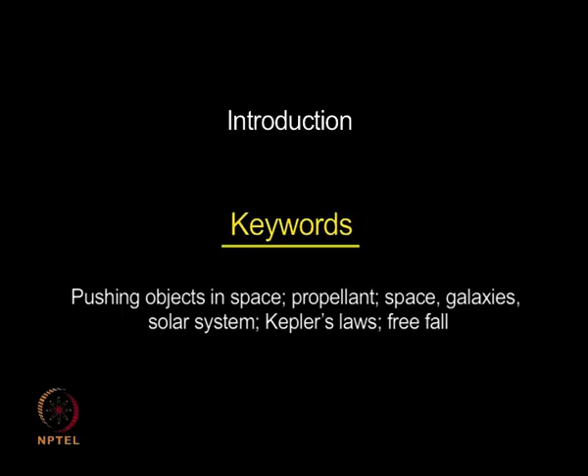Good morning. This will be our first class on rocket propulsion. Today we will look at what the subject of rocket propulsion is, how it differs from other propulsion subjects, and what aspects we must consider. We will go through the course contents, the books we must refer to, and then get started. The introductory part will take something like 10-15 minutes.

Let's take a look at what this subject of rocket propulsion is about. The word propulsion, if you see, comes from the Greek word propellere. The word propellere in Greek means push, therefore we are talking of something pushing.

Pro, as you know, means something like forward or before. Therefore the word propulsion means push forward, and whenever we talk of any subject on propulsion, what we mean is pushing forward. Let us take the simple example of a car which has to climb up a hill, up an inclined plane.

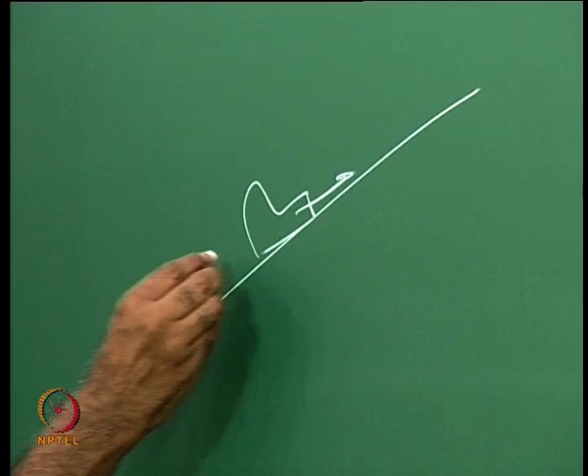What we do is the engine of the car pushes it forward, and by pushing I mean you are changing the velocity of the car, or you are imparting a momentum to the car.

What is momentum? Momentum is change of what? You are imparting some change of momentum to the car. How would you define momentum?

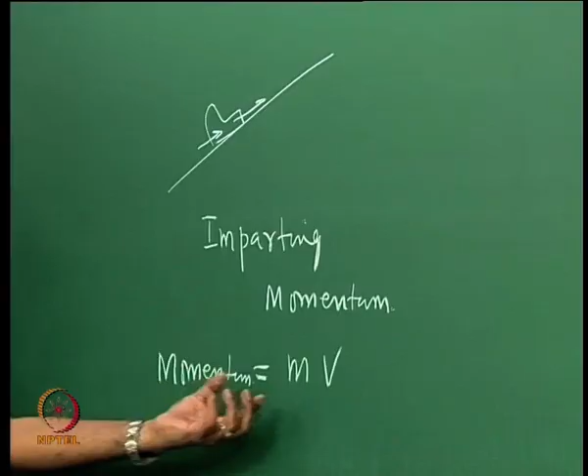We say the car has a velocity v, it has a mass m, and mass into velocity is what is momentum. If you want to change the momentum, you change the velocity of the car, you give some velocity, and you have what we call momentum.

Now in space, deep space, we do not have something like atmosphere, and therefore the act of imparting momentum to an object in space is what we deal with in rocket propulsion.

I will repeat this. All we are saying is propulsion means pushing objects, and when we say rocket propulsion, we are dealing with pushing objects in space. Space means anything beyond us, maybe up there. So first we must get an idea on what space is about.

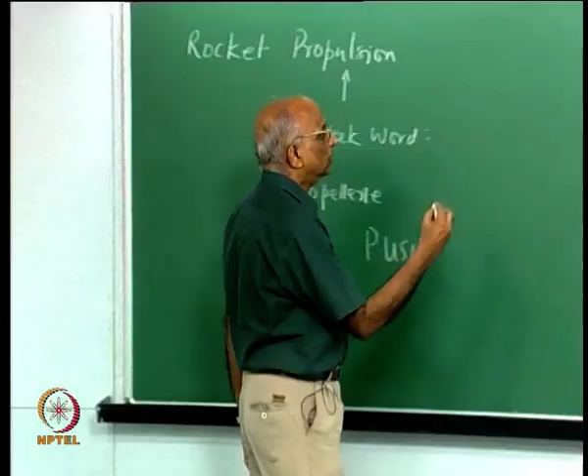Let us understand what we mean by space, but before that, let us quickly get through some idea on what this whole course is about and how we are going to organize our next 40 classes or so. To be able to organize ourselves, let me get started here.

Maybe the first class, starting today, we will look at what we mean by the word space, what constitutes space, and in what way motion in space is going to be different than motion on the ground. That means we talk about motion in space, and once we know how motion takes place in space, maybe we will be able to find out the exact requirements that a rocket must meet.

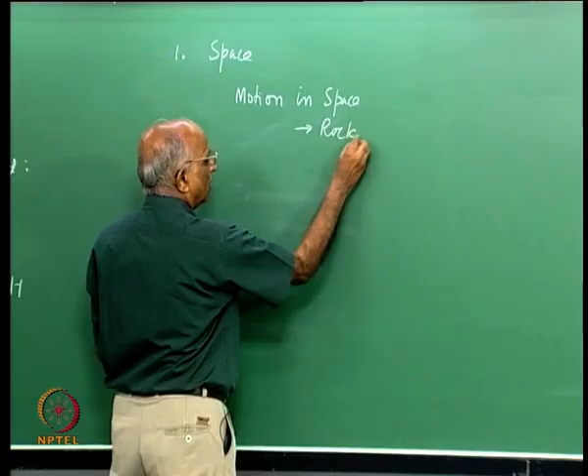To be able to design a rocket, which could be something very small or it could be huge, I must know what is the requirement of motion in space so as to go and make a particular rocket. Therefore the first chapter will deal with motion in space and how we go about converting this motion in space to the requirement of a rocket.

Once the requirement of a rocket is clear to us, the second chapter will deal with the theory of rockets. I would like to ask a question: why should a theory of rockets be different from a theory of a car? Or let us say I have a gun, I fire a gun, the bullet leaves the gun. In what way is a rocket different from a gun?

What is your thinking on it? Anybody could answer that? You say it's a non-air breathing system. So what? We will get into some details of air breathing versus non-air breathing. Your point is it's a non-air breathing system, but in what way should a rocket be different?

Let us say I have a gun, I fire a bullet from a gun, I am also leaving it at high velocity. Why should we call it theory of rockets? What is the great theory about it?

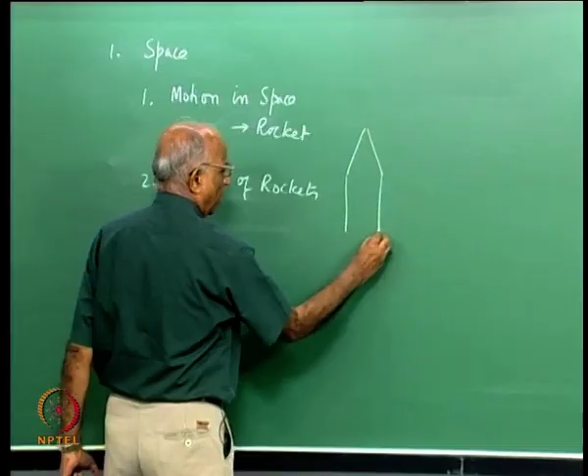What happens is in a particular rocket, let us say we just assume a rocket is like this - there is some mass which is available in the rocket. What is the mass which is available in a rocket? The mass must be able to push forward, that means it propels the object.

And what is the object? You have something like a space capsule which it pushes forward, and what propels this is what we call a propellant.

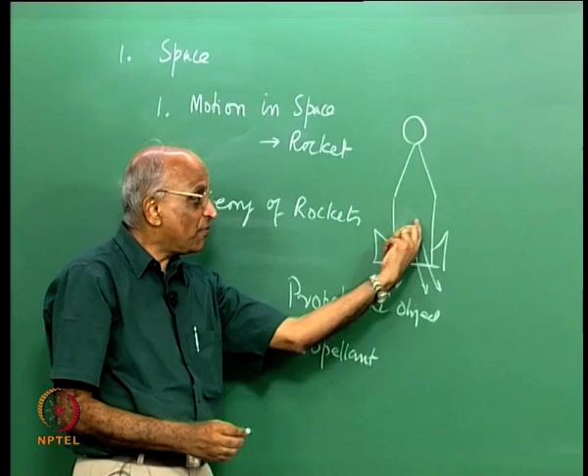By propellant in a rocket, we mean the substance used for pushing up the rocket, or propelling the rocket. In the case of a rocket, the propellant is continually getting exhausted, it leaves the rocket, and the weight of the rocket keeps coming down. Compared to a car in which I carry something like 10 liters of petrol, I carry tons and tons of propellant which is ejected out. So the theory of a rocket is different from a car or a bullet, and we have to look at the theory of rockets, which is the second chapter.

Having finished the second chapter, we told ourselves to push an object we need to give a change of momentum, and so we will go into nozzles which produce high velocity and help us achieve a large change of momentum to the object in space.

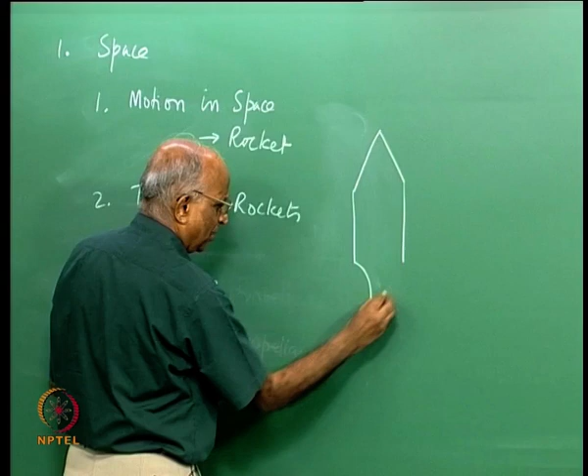You have all studied nozzles in your gas dynamics course, right? Has anyone not done it? We will start from the basics, go through the basics of nozzles, advanced nozzles, but it is quite an involved chapter. If you have something like a rocket, let me sketch the internal configuration, I have something like a nozzle here. The flow must run full, otherwise if some portion does not run full, I could get a side force in addition to getting a force in this direction. So the theory of nozzles is quite involved, and the third chapter we do here is on nozzles.

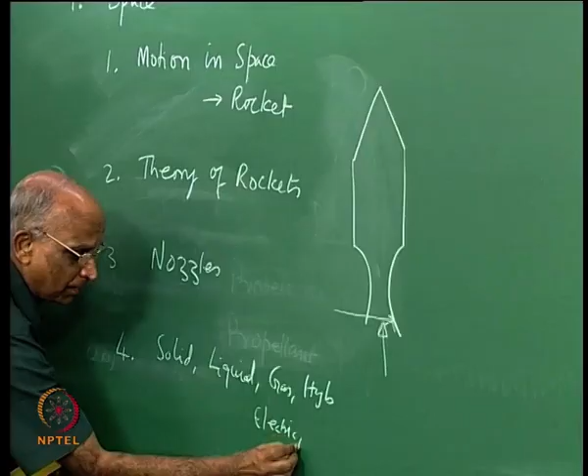The fourth chapter we will get back into the propellants, what is used for propelling could either be a solid propellant, a liquid propellant, a gaseous propellant, a hybrid combination of these, could be electricity itself, could be nuclear, could be anything, right? In the fourth chapter we will study the different propellants, what are the characteristics required to make a good rocket, studying solid, liquid, gas, hybrid, electric, maybe nuclear propellants.

Once we are clear about the propellants, we can go into the details of the rockets. The fifth chapter would be solid propellant rockets, and this type of rockets has been used very extensively in India, both for GSLV and PSLV. We will look at the design considerations, what constitutes a solid propellant rocket.

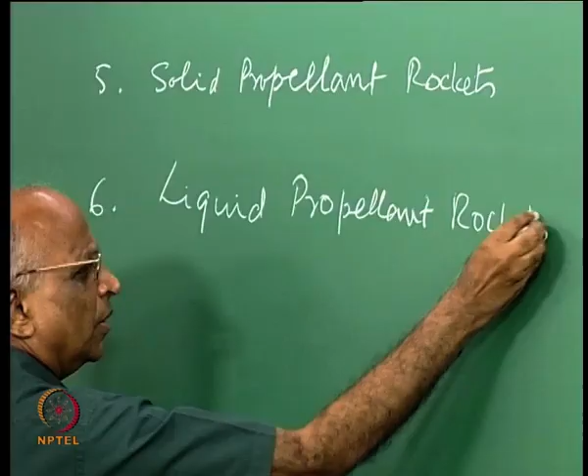The sixth chapter would be on liquid propellant rockets. They are more versatile, and in this chapter we will basically look at the cycles of operation, in what way it differs from a gas turbine combustor or an IC engine, and what are the modeling features. The liquid propellant rocket is something which is evolving, and when we talk of cryogenic propellants, it is again a form of liquid propellant, so we will spend quite some time on this.

The 7th chapter would be something like, since we have studied solid and liquid, we can study something on hybrid and something like a single propellant, what we call monopropellant rockets.

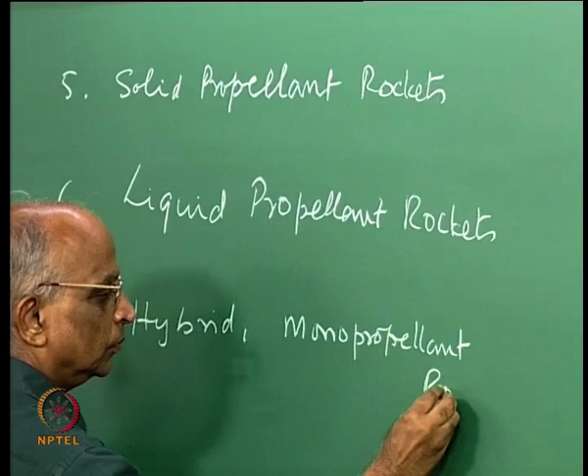This would finish the different types of rockets, how to make them, what are their features, and what are the problem areas in rockets. Once we are clear about it, we go to an advanced subject which I will call combustion instability. This particular chapter on unstable combustion and instability is particularly important for PG and research students, since we are going to look at what causes, instead of having a steady thrust, it to oscillate under some conditions, instead of burning steadily it explodes under some conditions, and that is what we study in combustion instability.

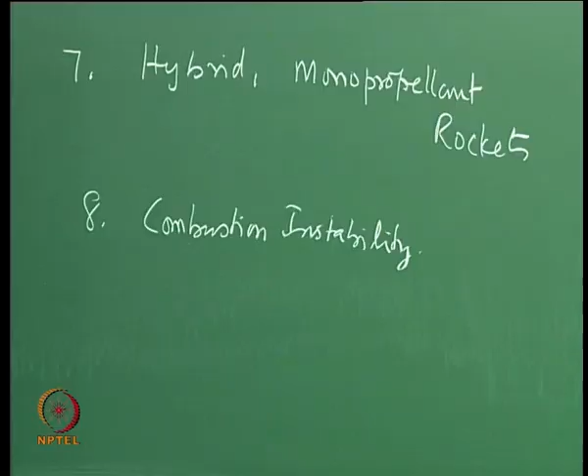We will deal with it in something like 6 to 7 classes. It tends to be important, and this is an area where research work still goes on in rockets. The 9th chapter will be an evolution of some of these things.

Maybe we will look at electrical rockets. What do we mean by electrical rockets? We told ourselves for any rocket we need to push an object in space. We will try to see how we can generate electrical forces, different forms of generating forces using electricity or electromagnetism, and then we will deal with this particular chapter on electrical rockets.

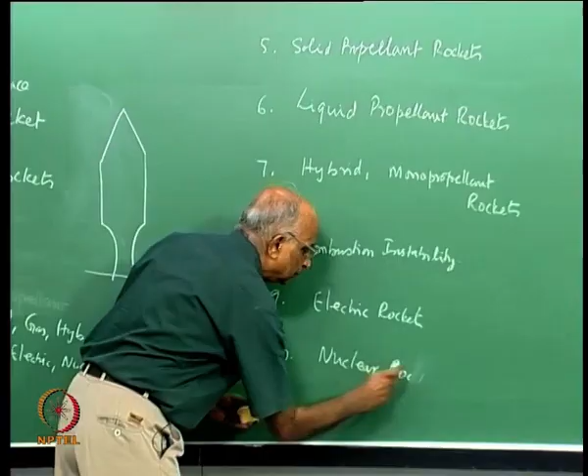The 10th chapter would be on nuclear rockets, and other advanced rockets.

What do we mean by nuclear? I could use nuclear energy to generate a force. I could also use space-time curvature, like relativity, to generate a force, and some of these things we will consider as the last segment of this course.

Let me also briefly brief you on one or two books which I will be following, which are good books for this course. The first book is by Sutton, on rocket propulsion elements. The publisher is Wiley, year of publication is 2001.

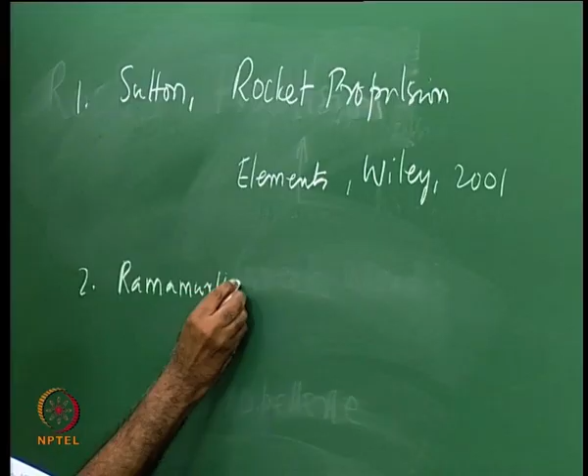This book gives a very good description of rockets, but the mathematics of rockets is missing, and I published one book, the name is Rocket Propulsion. It was published by Macmillan in 2010. This was based on my teaching of the course over the last 6 to 7 years.

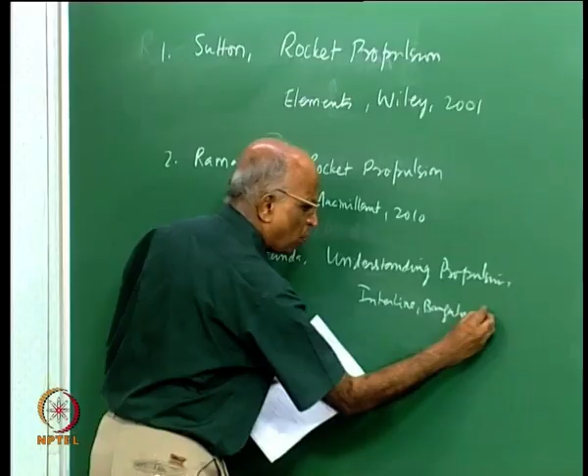A third book which gives good description about the different rockets is by H.S. Mukunda. The name of the book is Understanding Propulsion. It is published by Interline, Bangalore, and I think it was published in 2004.

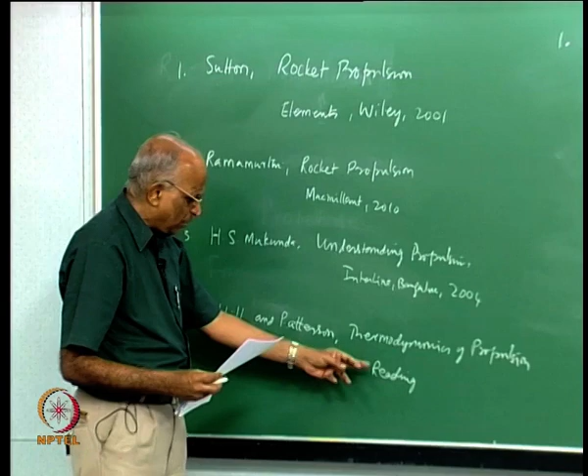I think one important book which I should have put at the beginning is a book by Hill and Patterson. The name of the book is Thermodynamics of Propulsion. The publisher is Addison Wesley. It is an old book, first published I think in 1970 or so, but the second edition is published in 1992.

We have copies of these books in our library. This is a beautiful book, deals with the thermodynamics of propulsion. This deals with a description of many of the propulsion elements. This combines aerospace and rocket propulsion together, whereas this is a little bit more mathematical in the area of propulsion. We should keep this, and as I go along maybe I will introduce more books on specific subjects.

Well, this is the background of the whole course, and I think let us get started now. Let's get started. What do we mean by motion in space? Anybody would like to hazard a guess in what way it will be different than on ground?

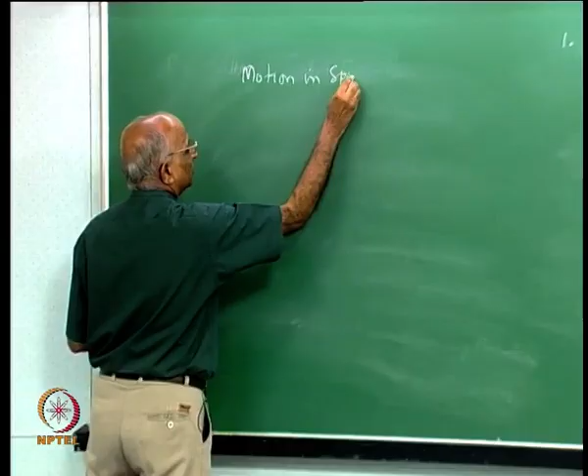Let us first define what is space. How do we define space? Anything above is space, can we say, or how would we define space? We go on up and up, or we go sideways, go to infinity, that is space, or how can we define space? We talk of space capsules, we talk of some planets, we talk of galaxies. How would you define space?

You are telling me that anything outside the atmosphere is space. Therefore, let's take a look at your question and examine what really space is about and what do you mean by atmosphere.

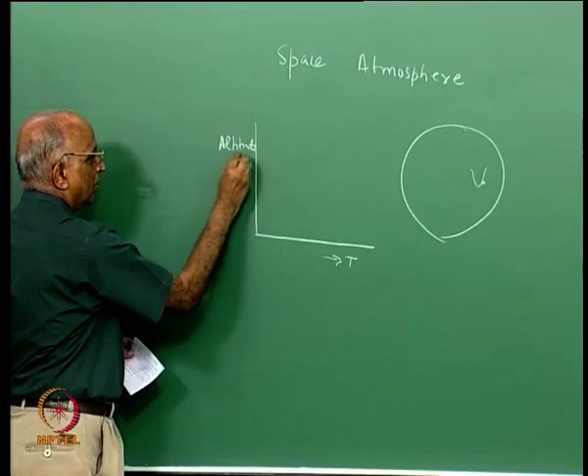Let us say we are here, let us say in Chennai. Chennai is normally hot, and let us try to plot the temperature in the air or atmosphere above Chennai as a function of the altitude, say Z. Since the sun is heating the earth, the surface tends to get hot, maybe the temperature at the surface, let us say, is around 35 to 40 degrees centigrade. As we go higher and higher up, that means as we increase the altitude, the temperature decreases until at an altitude of around 10 to 11 kilometers, the temperature is around minus 50 degrees centigrade.

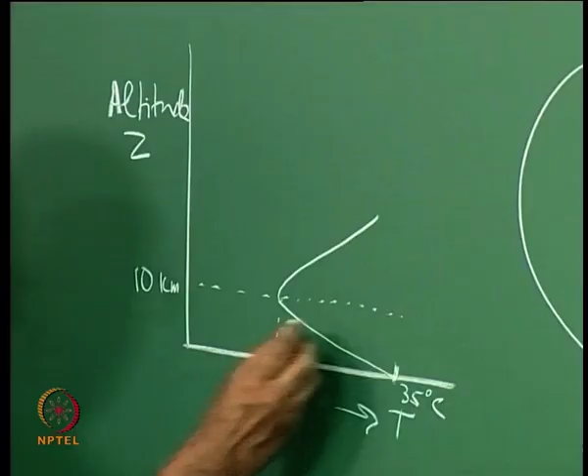These are notional numbers, and thereafter the temperature begins to increase again. That means temperature drops to minus 50 degrees centigrade at an altitude of around 10 kilometers and then begins to increase again. Why does the temperature decrease? The earth receives radiation from the sun, gets heated, and the surface is relatively hotter, and as you proceed away from the surface the temperature drops. This zone wherein the temperature drops is known as the troposphere. The reason temperature drops is the earth is relatively hot, and as we go higher up the temperature drops.

A jet aircraft flies at an altitude of around 8 to 10 kilometers, where the ambient temperature is between minus 40 to minus 50. You would have heard this announcement saying your aircraft is cruising at an altitude of around 10 kilometers, wherein the ambient temperature is of the order of minus 45 to minus 50 degrees centigrade. If you go up still further, the temperature increases.

The increase in temperature is because in this area you have a lot of ozone available. The ozone gets heated by the solar radiation, it absorbs the solar radiation, the temperature increases, and this increase manifests for another 40 to 50 kilometers, let us say 50 kilometers, and the region of increased temperature is what we call the stratosphere.

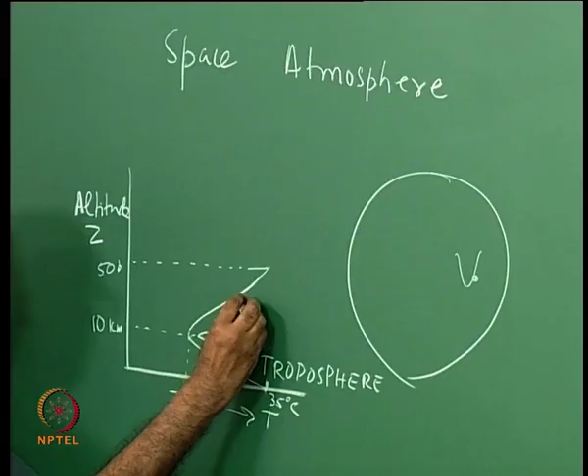But when we go still higher altitude, let us say higher than 50 kilometers, the pressure in air is so small, or the molecules of air are so few that they are unable to absorb any radiation, because there is nothing here. Therefore the temperature again drops to an altitude of around 100 kilometers or so.

But if you go to still higher altitudes, you have molecular oxygen which absorbs radiation, the molecules individually absorb it and increase in temperature, and you have the temperature going up. The region wherein the temperature drops again is what we call the mesosphere.

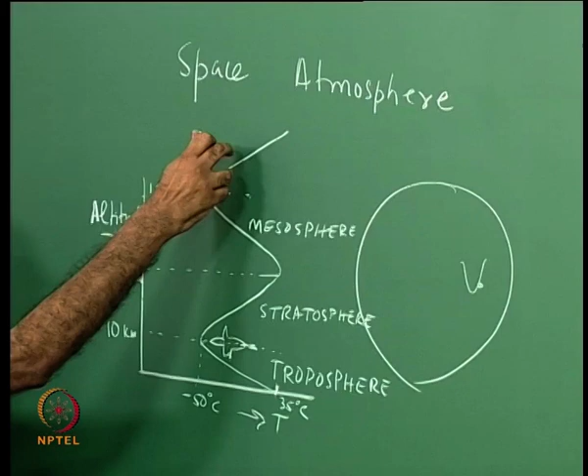And the region of temperature increase, because the individual atoms or molecules of oxygen absorb the radiation, individual atoms or molecules getting heated, is what we call the ionosphere. This continues for something like 100 to 200 kilometers.

If I were to plot the pressure of air as a function of altitude, again I plot the pressure, this is altitude Z in kilometers. At the surface of the earth the pressure is around 100 kilopascal, and the pressure monotonically drops, keeps on falling.

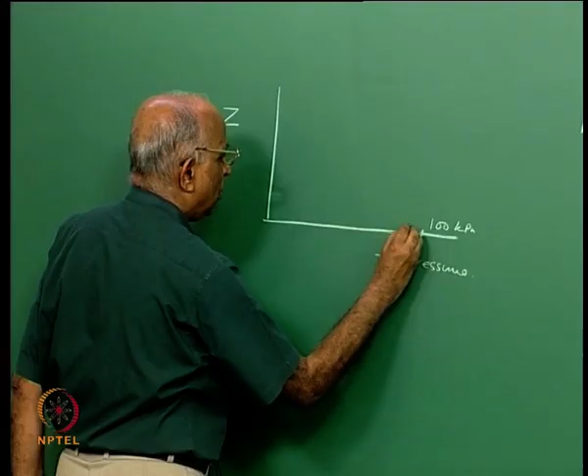Until maybe at the ionosphere you hardly have any traceable quantities of air left, it is all free molecular flow, and this is where we said the temperature increases. The concept of temperature fails because there is no continuum in this region, and it is the individual molecules of some of these gases which tend to get heated to high temperature, so the temperature increases again.

Now the question is, what do we define as space? Anything above the surface of the earth going through the troposphere, stratosphere, mesosphere, ionosphere and beyond, that means we say is space. It is sort of endless, it keeps on going to infinity, and therefore we must be capable of defining what constitutes space, which I do subsequently.

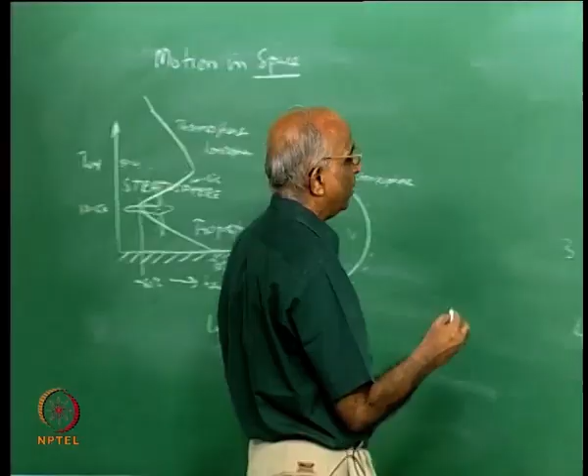And if you go back and see what is there in space, you see that there are something like 1.5 into 10 to the power 11 galaxies, not in total space, but in the space which we can see, which we can observe. Rather, I must correct myself: in the observable part of space, and how do we observe? Maybe through a telescope. In the observable space we have something like 1.5 into 10 to the power 11 galaxies. That means space is still beyond, but what I can see is only this.

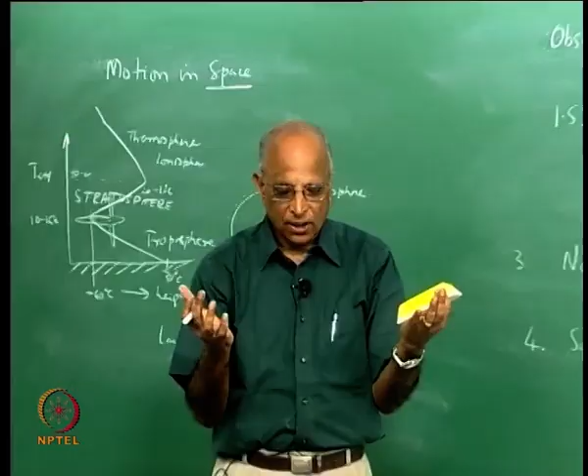And what are galaxies then? All of a sudden we are introducing new words. By galaxies we mean you have typical stars, gravitationally bound systems of stars, and each galaxy has a system of stars and lots of maybe some dark matter, something like gas, dust and all that. It could contain a lot of things, and out of these 1.5 into 10 to the power 11 galaxies, if I consider one galaxy to which we belong,

that we say is the Milky Way galaxy.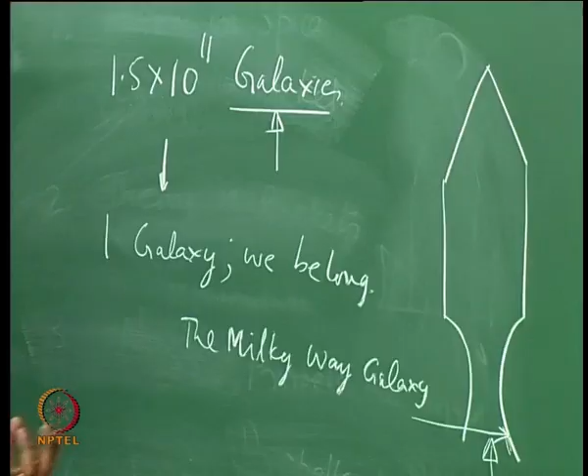Therefore, what we have said is space is endless. In the near observable space we have something like 10 to the power 11 galaxies, and our attention has now come to the galaxy in which we belong to, or in which we live, which is called the Milky Way galaxy. Why the Milky Way? It comes from some Roman or Greek mythology which says the color is something like milk, or there are some stories around it. We will not get into those details, but just say when we talk of a number like 10 to the power 11, we are something like 1 over 10 to the power 11 part of observable space. And when I talk of a number like 10 to the power 11, it is as if saying that on the beach you have lots of sand particles, and I put all the beaches together and take one sand particle - this is the amount of space I am considering from the near observable space. Therefore, we have shrunk ourselves, and you can see how small we are in relation to space really.

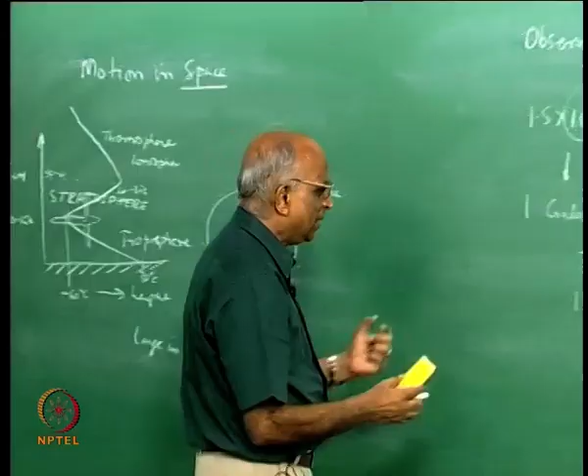And this Milky Way galaxy, if you really see what constitutes it, well, in the Milky Way galaxy you have a large number of stars, and what are stars? Massive objects in which nuclear reactions are taking place. They emit light, they emit heat. Then you could also have something like dark matter.

In between the stars, you could have some gas and stellar dust. You could also have a lot of different things - you all would have heard of black holes. What are they? We could have one in our Milky Way galaxy.

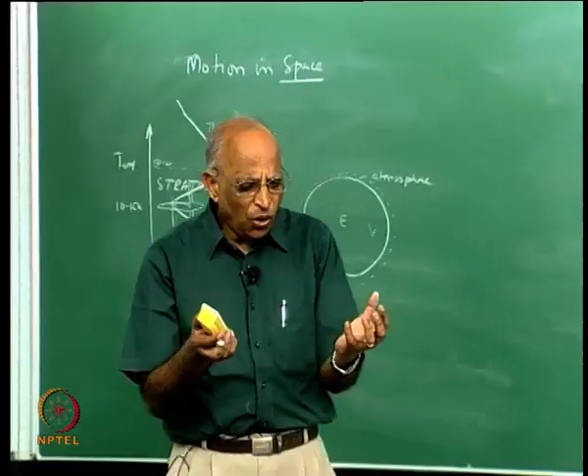What are black holes? What happens is sometimes these stars shrink to a very small size. Therefore you have a large mass concentrated in a very small volume, and when that happens, it is capable of attracting strongly - the gravitational pull will be large. We will get into gravitational pull towards the end of this class. We could also have other objects like quasars.

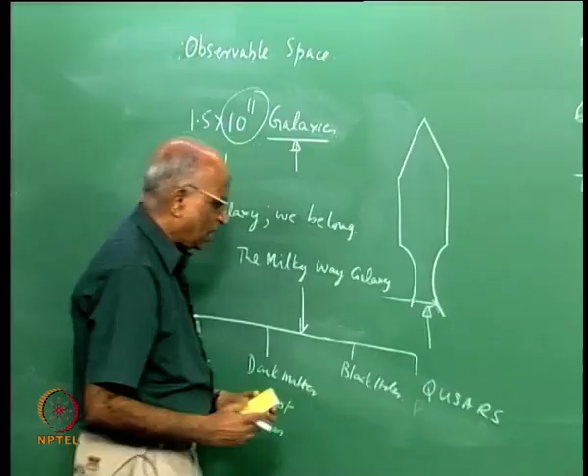What do we mean by quasar? Quasi-stellar radio sources - quasars - and these quasars are objects which are travelling at near about the speed of light itself.

Therefore you have a lot of things in our Milky Way galaxy, and out of all these stars, I figure out one star which I call the Sun. So we focus ourselves - maybe from 10 to the power 11 galaxies, we have come to one galaxy, and out of all this we have come to the Sun, a single star, which is what we will basically be interested in. Let us put it together.

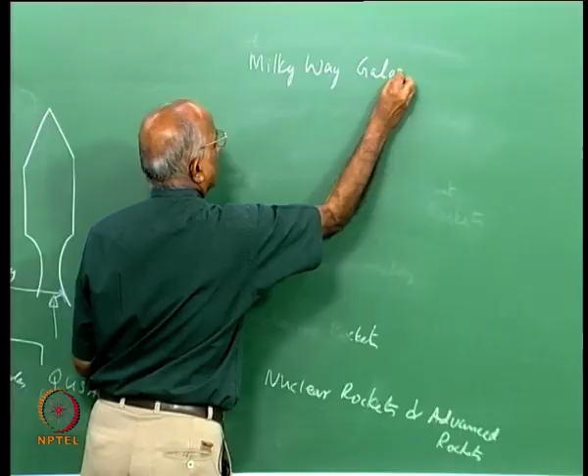Let me put some dimensions out. If you look at the Milky Way galaxy, let us see its extent. It is somewhat cylindrical in shape. The size, or diameter, is around 10,000 light years.

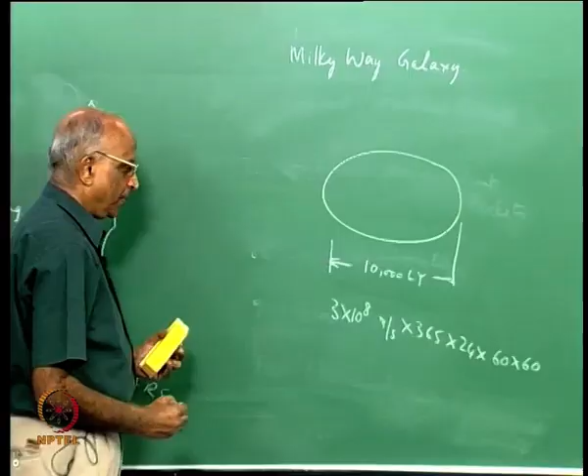Therefore we are talking of a diametral extent, and it is cylindrical in shape, with a depth of about 1/4 of this - something like 2500 light years. In this you have a number of stars, a number of objects, and we are considering one particular star called the Sun, which is the solar system we are concerned with.

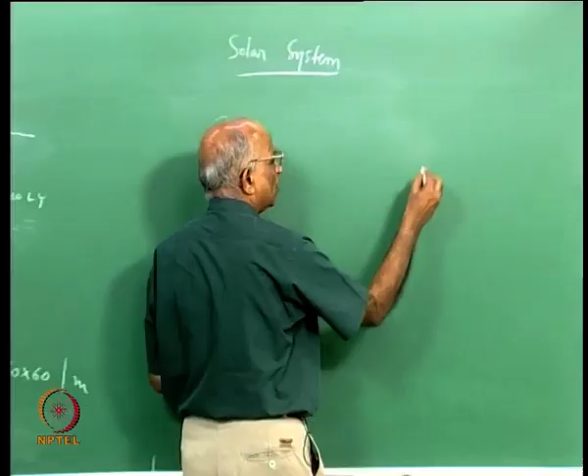This is all in space, right? We started with a number of galaxies in endless space, and now we come to the solar system. What does the solar system consist of? It consists of the Sun, a single star, mind you, out of the large number of stars, and a number of planets, starting from Mercury.

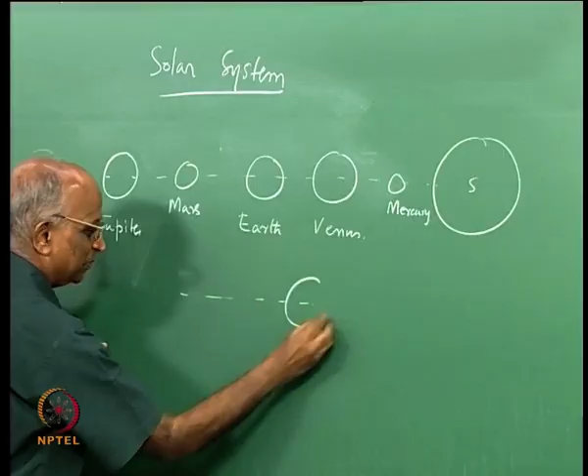Then you have Venus, a little bigger, then we have the Earth. What is next? Mars. What would be the next one? Then Jupiter. Then Saturn. Two more - Uranus and Neptune.

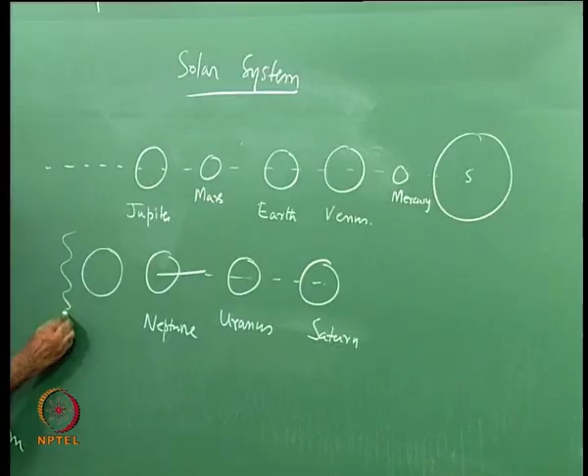Therefore you have 3 plus 5, 8 planets going around. Previously we had another planet known as Pluto, but that has been decommissioned because it is not fully formed. It is something like a loose mass which is still going along with a belt known as the Kuiper belt. I will come back to this belt because it gives a lot of inputs on what we need to understand about asteroids coming and hitting the Earth and all that.

We will get back to this shortly, but all we are saying is, in the solar system we have something like 8 planets going round the Sun, and this is the near part of space with which we are interested in. This solar system also consists of something like 31 moons.

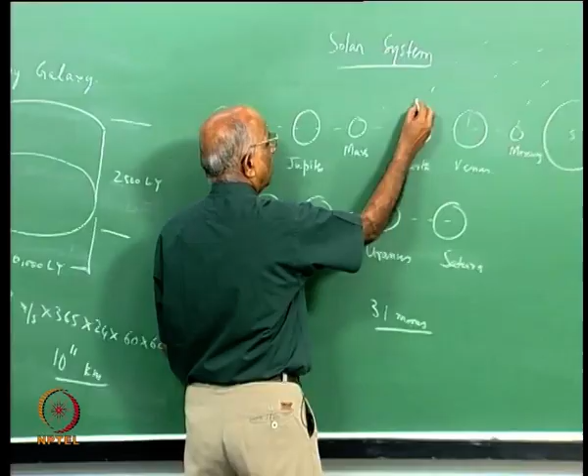And how do we define a moon? We tell ourselves there are certain objects which go round the planets, like satellites around them. There are 31 moons, and Earth has a particular moon going round it, which is the moon of the Earth. So also we have moons for Saturn, for Jupiter, and there are something like 30 other moons available.

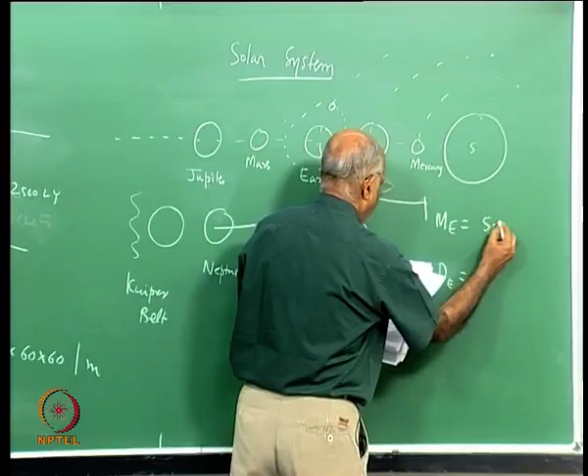When dealing with all this, it is necessary to have some idea of what constitutes these planets. Let us take Earth and put down its mass and diameter. The mass of the Earth is 5.974 into 10 to the power 24 kg, and the diameter of the Earth is 12,756 kilometers. I think these numbers are important.

I will circulate a table giving the mass of the different planets and their diameters, but just to get an idea, Mercury is about the smallest planet, around one-third the mass and diameter of the Earth, while the largest would be something like Jupiter.

Having said that, all these planets go round the Sun, and it is this motion of planets which prompted Newton to formulate the universal law of gravitation.

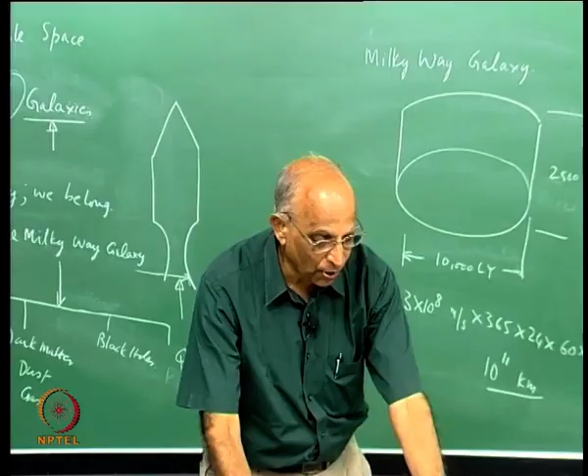I think I should repeat this point in a slightly different way. Let us quickly revise what we have done so far. We said propulsion or rocket propulsion deals with pushing in space. If you want to push in space, we need some force to push, and therefore one of the forces we should consider is the gravitational force. Let's start with that.

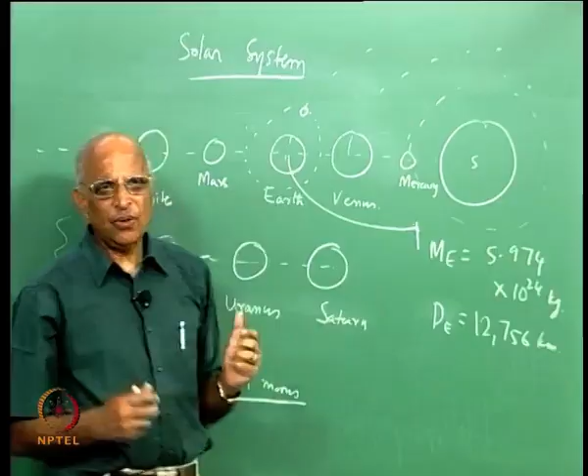To understand the gravitational force, it becomes necessary to go back into the solar system and look at the revolution of the different planets around the Sun. Let us take one particular case: I take the Earth here, and I say it is going round the Sun, maybe let us say the Sun is over here, and the Earth is going round the Sun as it were.

People have been watching the motion of planets around the Sun for years together, and around the year 1570 to 1610, we had a famous person by the name of Johannes Kepler. He derived 3 laws which govern the motion of planets like Earth around the Sun. His thing was, he said there are 3 laws, and what are the 3 laws?

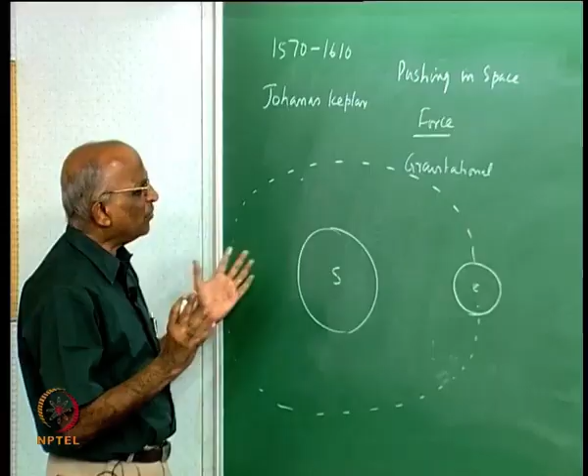Let us quickly get through these, because it will help us find out what we mean by the universal law of gravitation. He told the following: all planets move in an elliptical path, have an elliptical orbit. By orbit I mean the path of the planet around the Sun, and we are saying all the paths will be elliptical.

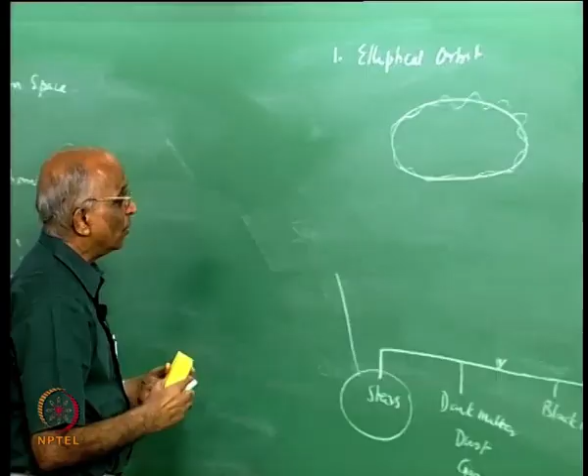But if you read the newspapers, around a month back there was news that the orbits are not really elliptical, but wavy orbits, something like this. Well, some work is still going on, we will not get into those details, but as per Johannes Kepler, we have the orbits in an elliptical path - that's one.

Second is his second law, which said something on equal areas. What is equal areas? He said, supposing we have a line joining the center of the Sun with the center of the Earth, and we find out what area is swept during the elliptical orbit, he finds that equal areas are swept out in equal times.

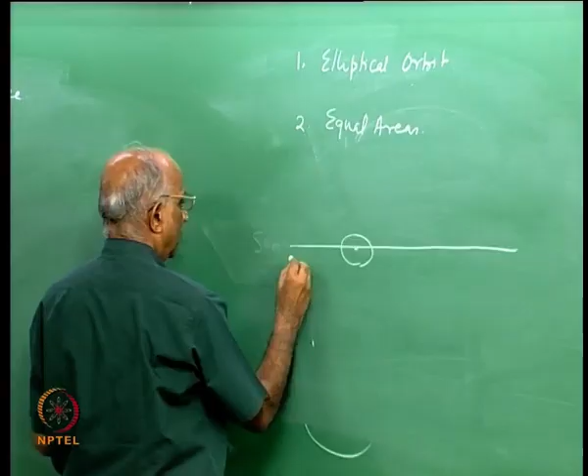Let us put it together. This is the Sun which is at the focus, and you have something like an elliptical path. Let us say this is the major axis, and then you have an elliptical path, this is the second foci, you have an ellipse as it were. This is the Earth going round the Sun. The first law says it is an elliptical path.

The second law says equal areas are swept out at equal times. If this is the time taken for this area to be swept out by the imaginary line joining the center of the Earth with the center of the Sun, then an equal area will be swept out during the motion from here to here.

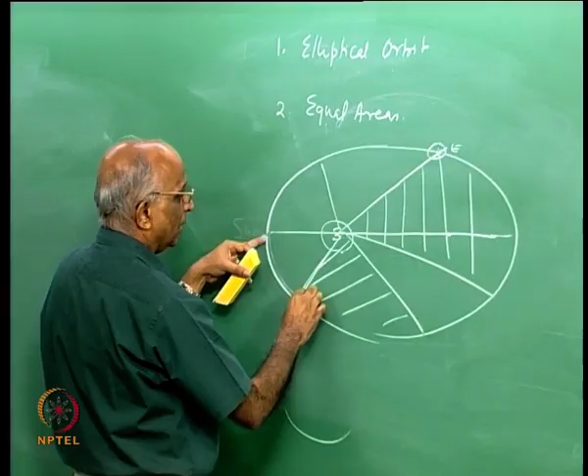All it tells us is that if I come to this particular path with a minor axis, it may travel a longer path here compared to a shorter path in this other one. This is the second law for orbits, given by Johannes Kepler.

The third law is about the symmetry of orbits. You have Earth, maybe Mercury nearby, maybe Neptune far away. It tells us that the orbital time t squared divided by the distance cube, the distance from the Sun to the different planets, is a particular constant.

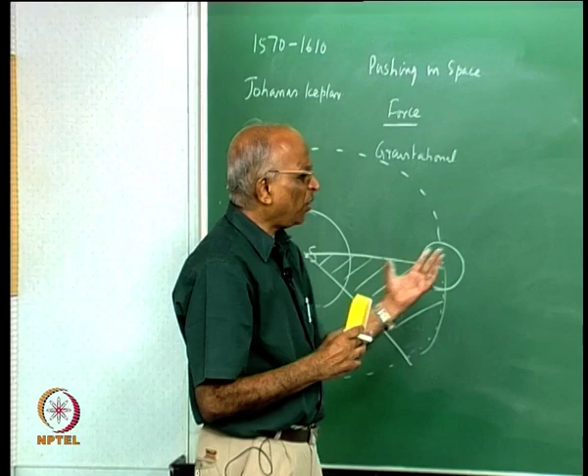These are the 3 laws for orbital motion as formulated by Johannes Kepler. Why are we getting into orbital motion? We are talking of space, we want to understand something about gravitation, and therefore you have these 3 laws, and then comes Newton much later. And what does Newton find? The story goes like this.

Maybe he is watching an apple fall on the ground from a tree, the apple is falling. He immediately connects the apple falling from a tree to the elliptical orbits or orbital motion of the different planets around the Sun. What is the commonality, what is the common factor between these two?

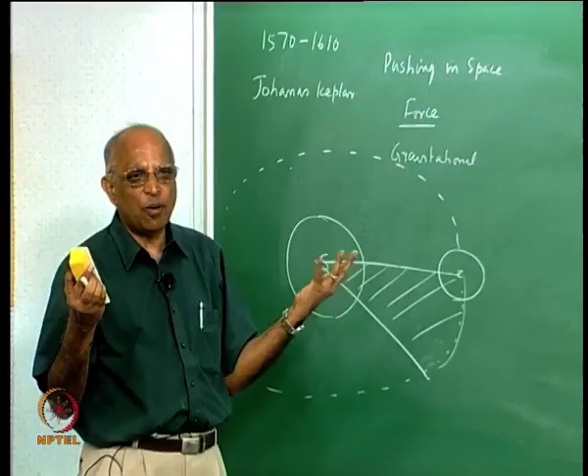Let us take another look at it and come back to this question of what decides planetary motion, what we are dealing with. Let us say this is the Sun. Let us say the Earth is going round the Sun like this. Maybe the Earth travels some distance like this, and it falls through some distance because it is elliptical.

Again, if the Earth had a horizontal velocity, it will go like this, but in the process of going horizontally it falls through some particular distance. Again it goes through some path, comes over here, again it comes like this. In other words, if I had given a horizontal velocity to the Earth, it keeps on falling towards the Sun at each instant of time.

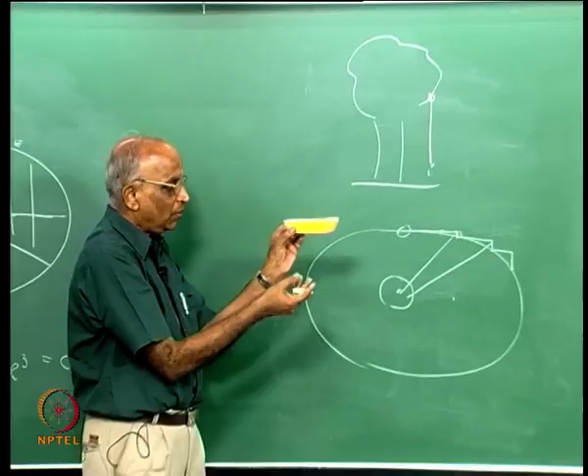In other words, if the Earth were to go horizontally at a velocity, it falls by a certain distance as it travels. That means I have a constant velocity and it keeps falling, therefore it is as if the Earth is freely falling.

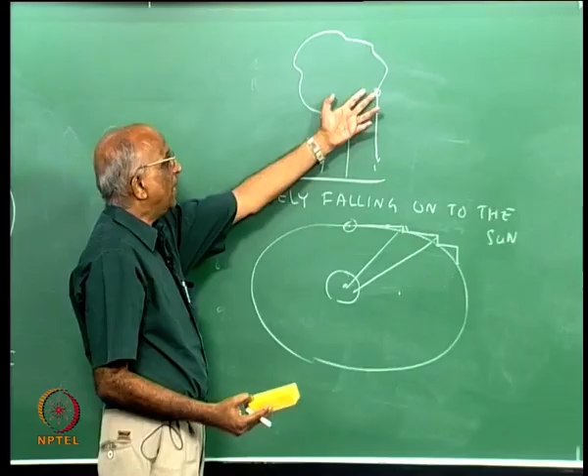It is no different from an apple which falls onto the ground. Actually, if we look at ourselves today, all of us are just freely falling towards the sun, just in the same way as a fruit or a stone is falling. Therefore, he says, well, there must be some commonality between an apple falling to the ground and the planets falling towards the sun, and it becomes something known as the universal law.

The point is, Newton did not do experiments by himself. He did nothing to really derive the gravitational law directly. Just based on observations of Johannes Kepler, and of course one or two more people like Galileo Galilei, who dropped a piece of feather and an iron ball and found that in vacuum both of them take the same time to come to the ground, just based on these two small observations, he was able to formulate this law.

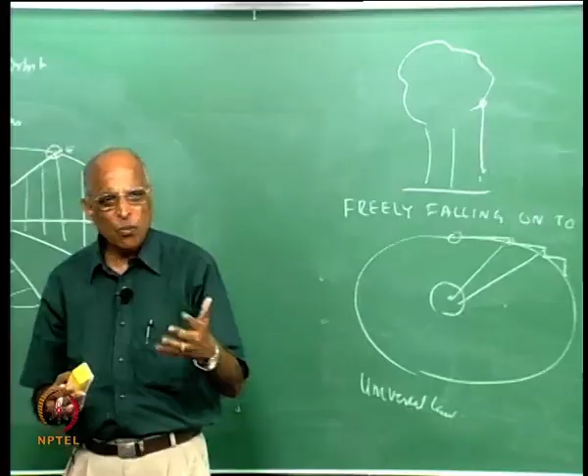But before I get into the gravitational law, it is necessary to go into some more details, like how do you measure, because when I say some force and all that, we must be a little more clear on what parameters we must use to describe motion in space. I think we must be very clear, because a time has come when I would like to put some numbers, some equations, I must know how to express myself.

Therefore, immediately we say, hey, we are all engineers, we know about mass, length and time. I can use these three fundamental quantities and describe it. How will you describe mass? Quantity of matter, unit is kilogram, well said. But what is a kilogram?

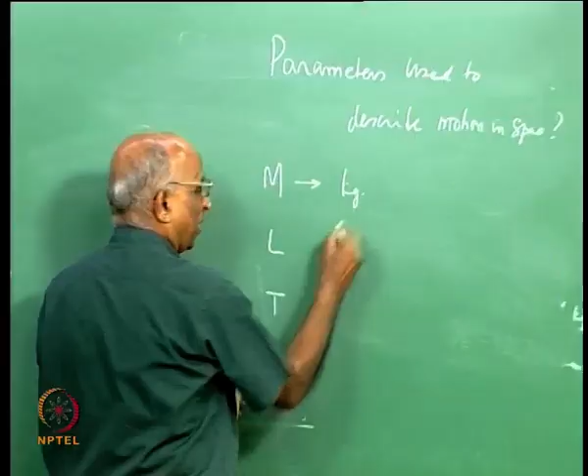It is some reference kept in a lab near Paris since 1889 or so. A standard is kept very carefully in a desiccator under controlled conditions so that nothing happens to it. It is a platinum-iridium alloy which weighs 1 kg, and it has been duplicated at different places, which we use as a standard. It is accepted, this is 1 kg. So also when I say length is in meters, what is a meter?

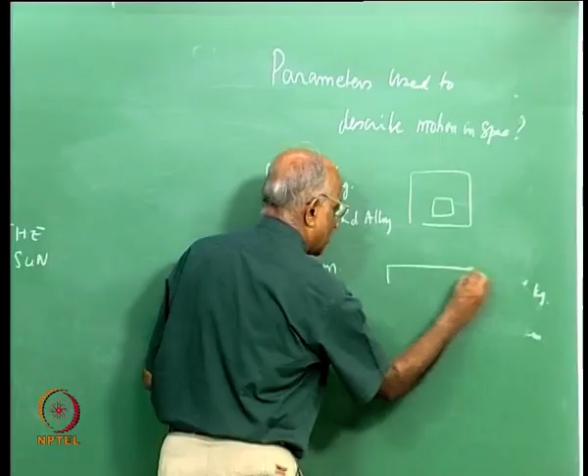A reference kept at the same lab for maybe the last 150 years - this is a particular length scale. The length of this standard is 1 meter, an exotic alloy of platinum iridium. But there are problems. Over 150 years, even stored in the best condition, with duplicates in other countries, it keeps eroding - some changes take place. Therefore it is not a good standard. We need a better standard. How will you have a better standard?

In the year 1983, quite recently, people said when I have a length standard and say a meter, I go and say a meter is so long and is the length of a standard. Instead of doing this, can I express the length standard through physical constants? What constant must I use so that whatever happens, the length is the same, it cannot change - maybe after a million years the meter will still be the same. The physical constant used for defining length is the velocity of light in vacuum.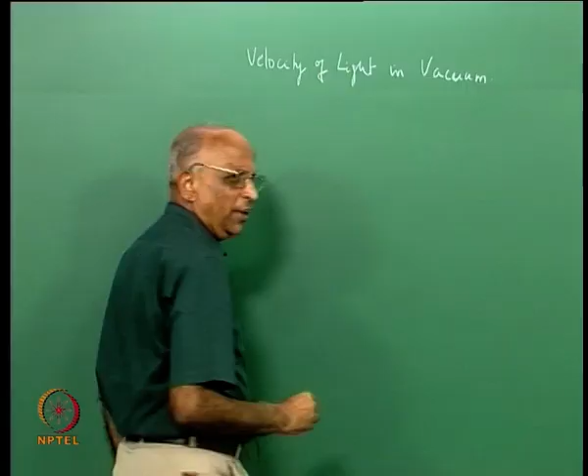All of us know light is propagated as an electromagnetic wave, and the speed at which light is propagated we say is c meters per second. The question is, can we use this constant - it is a constant because electromagnetic waves propagate through vacuum at a constant speed, c meters per second - and rather than define length in terms of a standard kept near Paris, we would like to define it with respect to this physical constant. How do we do that?

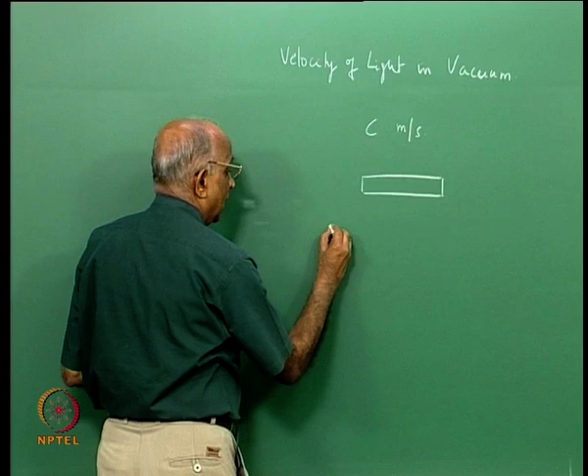If I could have a length we are interested in defined as 1 meter, we say the distance travelled by light in 1 over c seconds is what constitutes 1 meter. The speed of light is c meters per second, so light travels at c meters per second. The duration we are considering is 1 over c seconds - second and second get cancelled and we get 1 meter. Therefore the more recent definition of the length scale is with reference to the velocity of light in vacuum, which is c.

The precise value of c, as we told ourselves earlier, is around 3 into 10 to the power 8 meters per second - 299,792,458 meters per second. Therefore the definition of 1 meter is the distance travelled by light in vacuum over a duration of 1 over 299,792,458 seconds. This is how we define the length scale as a meter.

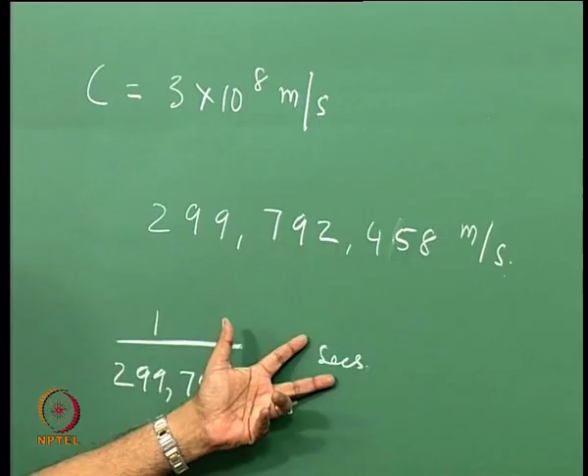So what have we done so far? We considered something like the definition of mass as a standard kilogram, and length as a standard meter, but now we are saying the meter corresponds to the distance travelled by light in vacuum for a duration of 1 over 299,792,458 seconds. But then we have still not defined time. How do we define time? We must be very clear - time is something related to duration.

Let us say you have a pendulum - it goes up and down. The duration of one cycle, from where it starts, goes across, and comes back, is what we say is the duration of this pendulum, which we call 1 second. But it is difficult to have a period like a pendulum used to describe the time scale, and it's easier to define the time scale based on the duration of an event.

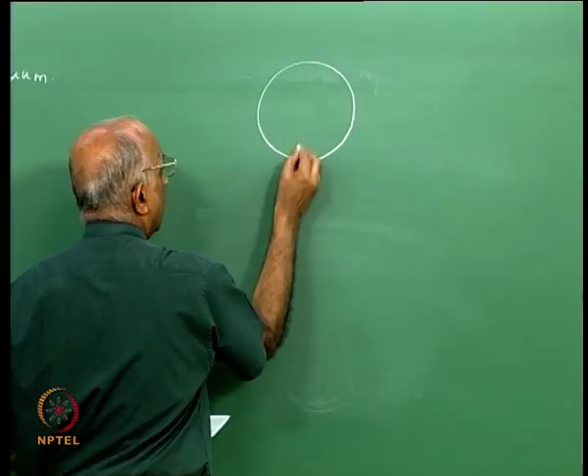Which event is simplest to describe? We have the earth revolving around its axis, and it looks at the sun. One revolution of the earth around its axis is what we call 1 day. We call midday, the middle of the day, as when the sun is vertically above us. The sun is vertically above a particular part of the earth - we call that midday, and going to the next midday corresponds to one period of rotation.

We call this 1 solar day. A day consists of 24 hours, each hour consists of 60 minutes, each minute consists of 60 seconds, and therefore 1 solar day consists of 86,400 seconds.

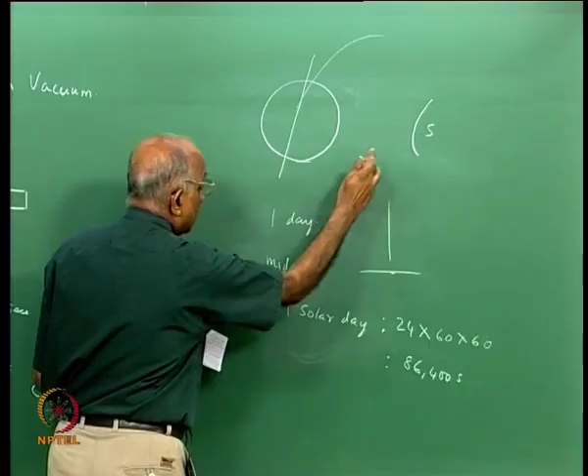Now, there is one problem. Earlier we said the earth is rotating around the sun, and as it rotates on its axis while revolving around the sun, the period of rotation is not exactly 1 day but slightly shorter. So the exact period of one rotation is not 1 solar day, but instead of 24 hours it is 23 hours, 56 minutes and about 45 seconds, and this duration is known as a sidereal day.

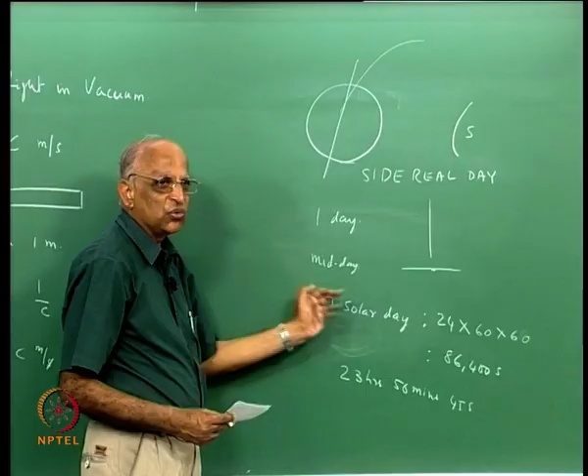Therefore we have complicated the issue. Instead of one solar day, we said we need something like a sidereal day which is slightly smaller than 86,400 seconds. But still, there are perturbations in the rotation and in the path around the sun, so it is very difficult to define time accurately in terms of either the sidereal day or the solar day. It is necessary to have some other standard for defining time.

Therefore, the scale or standard for defining time, that is seconds, is defined through some other standard. How do we do it? Maybe you know cesium - we have cesium-133, it is an isotope element and it emits radiation.

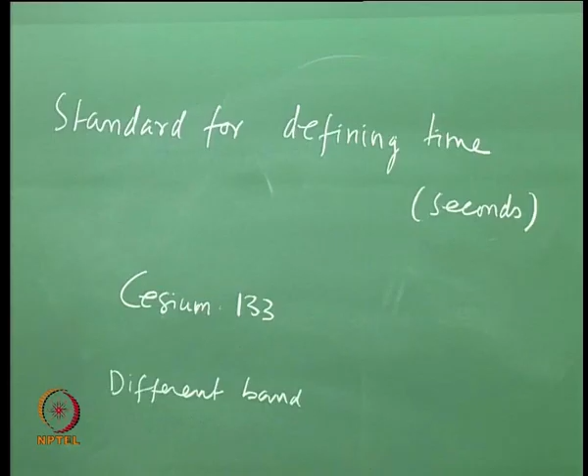It emits radiation in different bands. What do we mean when something emits radiation? It is emitting packets in some wavelets and keeps emitting at some frequencies, and each of them is a period, so many periods of radiation are emitted. We look at one specific band, namely the ground state of cesium, and at this ground state you take one hyperfine level, and a specific number of periods emitted there.

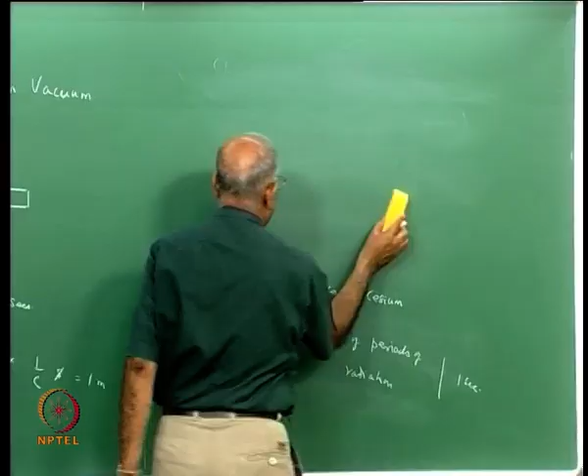So many periods of radiation emitted at the ground state in this particular hyperfine level is what we call 1 second. How do I put this hyperfine level? Let us explain again. At this ground state, cesium is emitting radiation, and each wavelength corresponds to a specific period.

I count a large number of these wavelengths, and the number of periods or wavelengths amounting to something like 9,192,631,770 periods or wavelengths corresponding to this ground state at the hyperfine level is what constitutes 1 second.

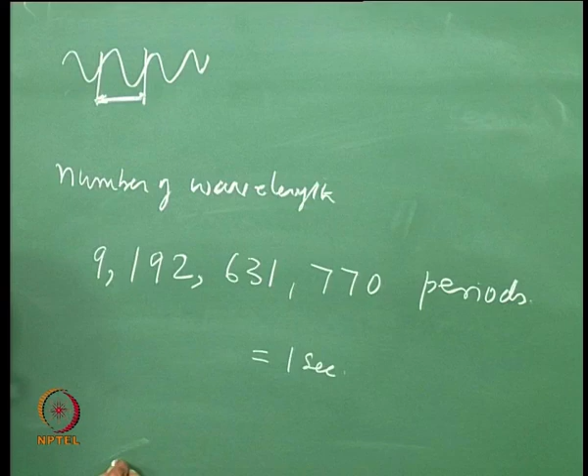What do I mean by this? Just to be clear, you have one period of radiation, or one wavelength. This wavelength corresponds to a time of 1 over 9,192,631,770 seconds, and this is how we define time. Namely, in this ground state of cesium, the 9,192,631,770 periods of radiation emitted is what constitutes 1 second, and this is an accurate way of defining time.

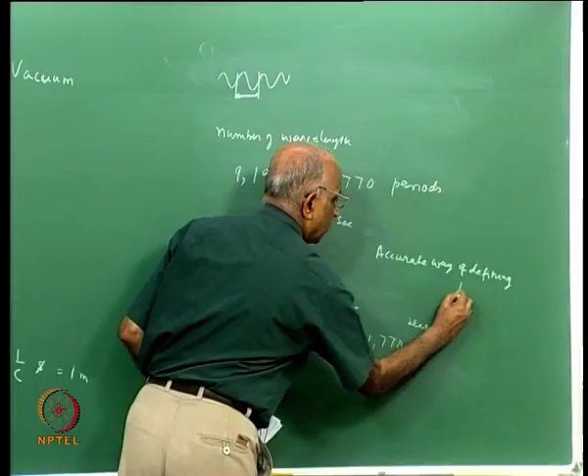So what have we done so far? Let us quickly recapitulate. We have defined mass as a standard, we have defined length as a standard - length defined on the basis of the velocity of light. Then we said we need to define seconds, or time, as a standard. So now we have defined mass, length, time, and now we can derive a set of units.

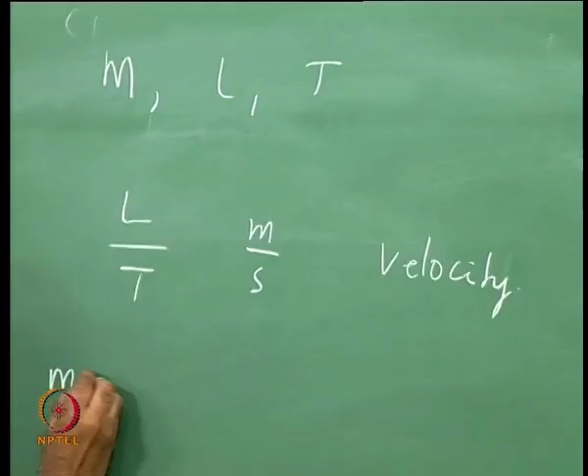Length or distance divided by time has units of meter per second, and this is what we call velocity. When I say distance, distance could be a vector, and therefore velocity is a vector. If I say momentum, we say mass into velocity, so the units become kilogram into meter per second - this becomes momentum. We say change of momentum is impulse, and therefore impulse will have units the same as momentum, namely kilogram meter per second.

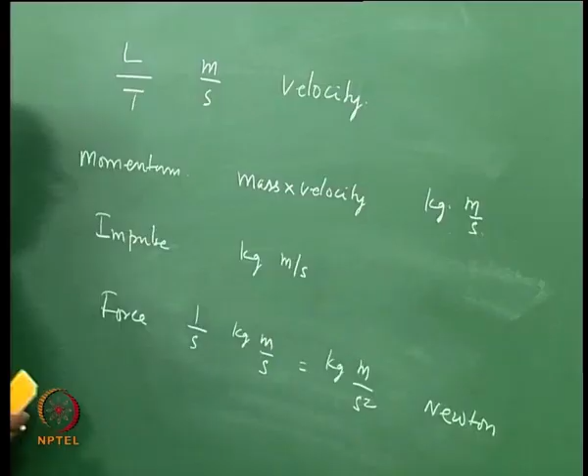We went forward and said that rate of change of momentum is what constitutes force, or rather impulse divided by time is force. Therefore force could be defined as rate of change of momentum, that is 1 over second into momentum, kilogram meter per second, so the units of force become kilogram meter per second squared, which is what we call Newton. So we have defined, through these three basic definitions of mass, length and time: velocity as meter per second, momentum as kilogram meter per second, impulse again kilogram meter per second, and force as kilogram meter per second squared.

Having defined these quantities, it is time to go forward and examine how we can describe, using these units, the motion in space of different bodies, and this is what we will do in the next class. Thank you then.